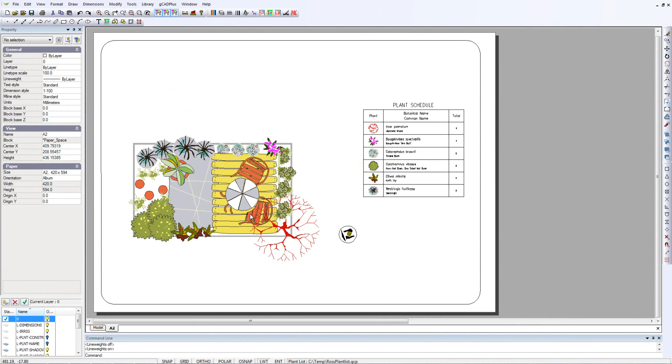Well, this design I think could be improved a little. You'll notice that the design itself takes up a relatively small amount of space. We're actually inhibited, if we double click here, by the need to put the plant schedule there.

But if we bring the little box down and put it like so, and then come back onto the layout and deactivate it, we've got a much better looking presentation.

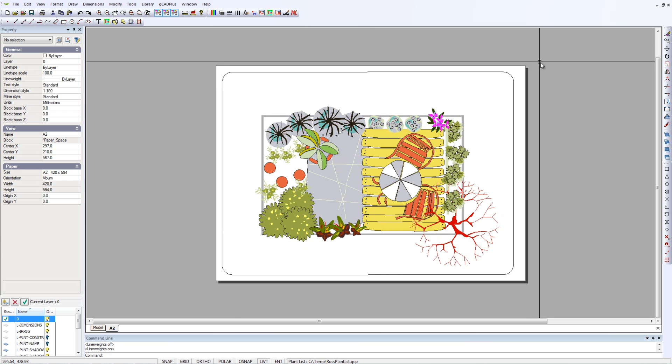If we select our box, I need to hold the shift key down and just deselect the window. We've now got the window. We could move our presentation to the left of the sheet.

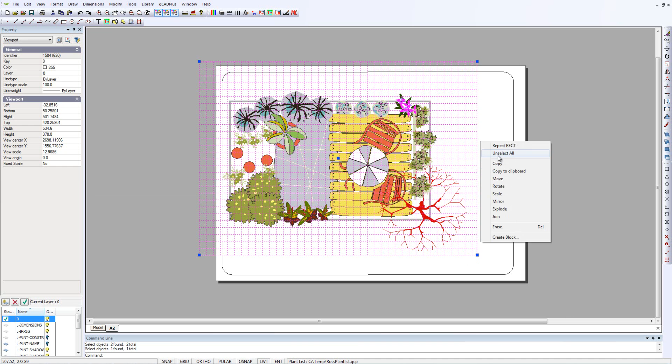I'll now unselect all. And if we went back into model space and just selected our north point, we could move our north point into a convenient spot there.

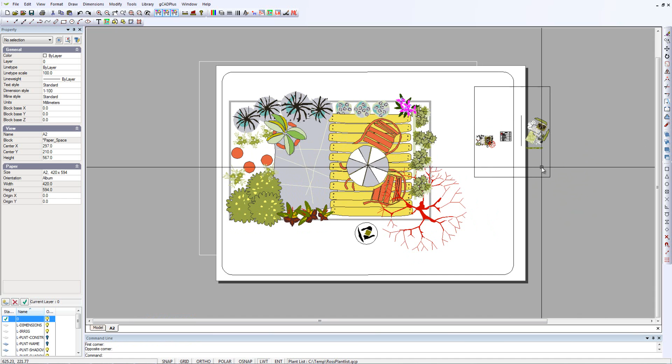And if we now go back to our layout here, and we right click and add a viewport here, I'll just set it over like so for the moment. It has its black background. That enables me to double click in there and move my box. I'll zoom in.

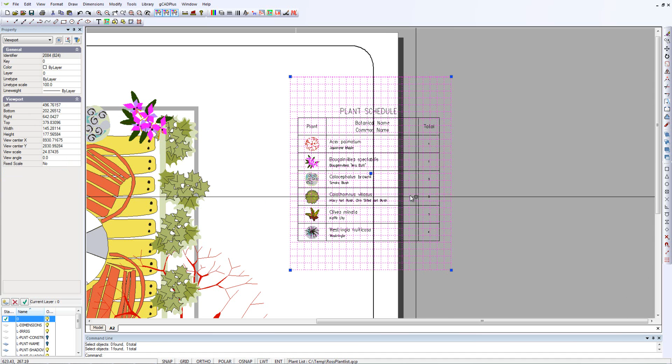What we want to do now is create a second floating viewport that's going to hold the schedule. We'll display on the layout and see how we're going. We can deactivate that and then just select it and move it into position, and it fits rather nicely.

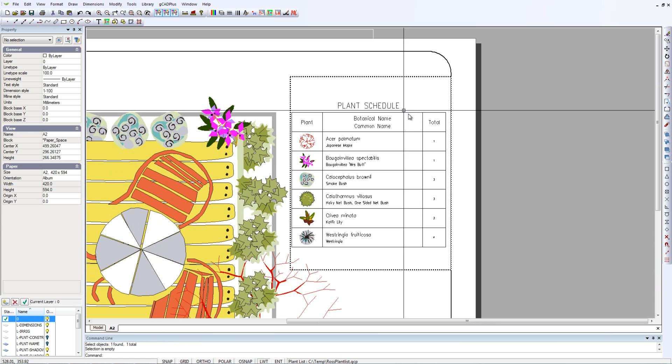Our border's not quite right. Let's see if we can get a little tighter. So we'll bring that down in. I think that's going to be a little better. We need to go slightly larger, perhaps another step, and display that on the layout. And that looks quite good.

I'd like it to be, I think, I can move that to the right, so we'll deactivate it. Just get it there. Maybe move it up like so. Now we're not quite right. We'll come down. And there we have it.

At that point, provided I'm happy with the layout, I can select it and make the color white. 255, 255, and there we are. And if we zoom extents, I think now we've got a better looking layout.

On reflection, I think we could even move that frame up. Let's try it. And like so, we might well get away with being able to move the... it's a bit tricky when you've got that border in. You're probably better off to leave it to later.

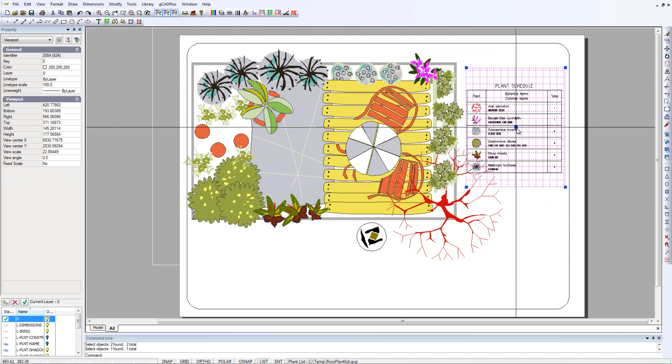We might now be able to move that schedule down into that area on the sheet, and that looks pretty good, I think.

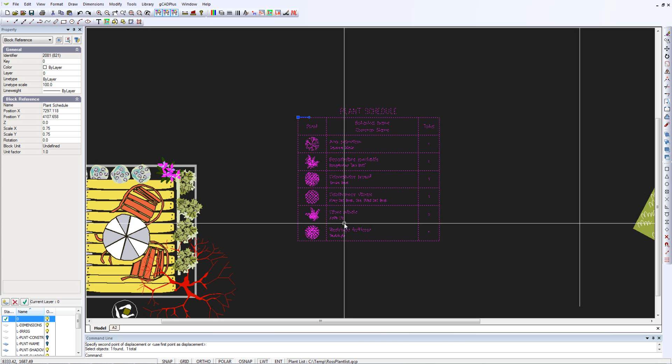Last little move of it, but we could even make sure that it was above, it being the frame there, above the tree. So let's come back here and we can pick this and say Tools, Draw Order, bring it to the front, and now when we come into here, our plant schedule is in fact above the tree.

It's slightly annoying me. I can't quite find the right space. I'll do it again and put it back to where I originally had it.

So I really do need clear area. And what I'm actually going to do is get the rectangle and just move it out a little, and now I'm happy with that as a form of presentation.

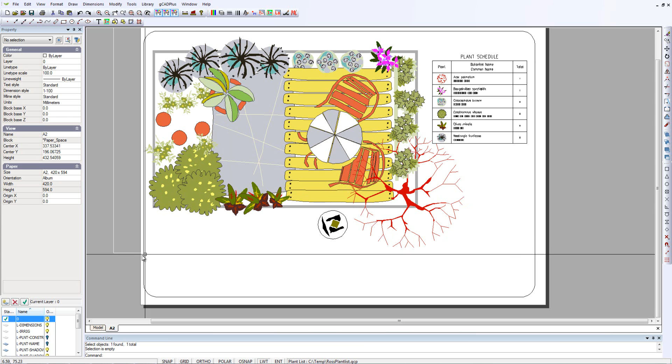He says, and still now wants to move this down to center it on the sheet. That's a much better presentation. Not concerning ourselves at the moment with what scale that is, but it clearly shows the design to the client in a well set out and more magnified format.